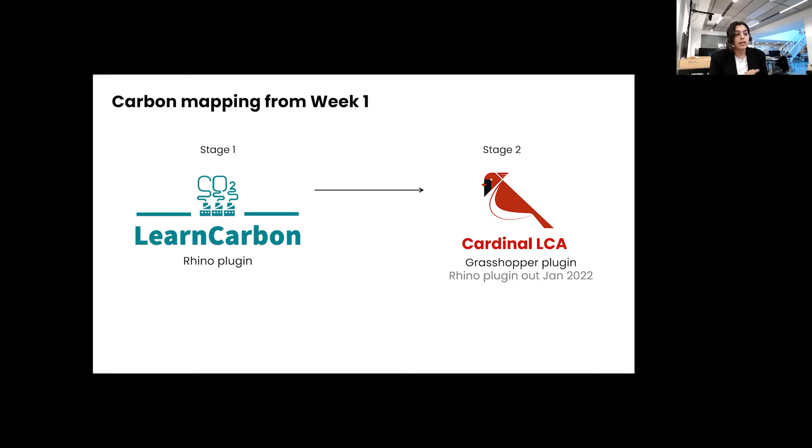So to start off with, we say that both of these are early stage tools, and that's what the topic of this presentation was. But how early are we thinking of? That's where we decided to bring both of these tools in, because Learn Carbon is more a Rhino plugin, which is at week 1. So at the time when you start building your building massing, when the project is just given to you. And Cardinal LCA comes in when the project is a bit developed, but not that developed to be in design development stage. It's still in the conceptual design stage or the competition stages.

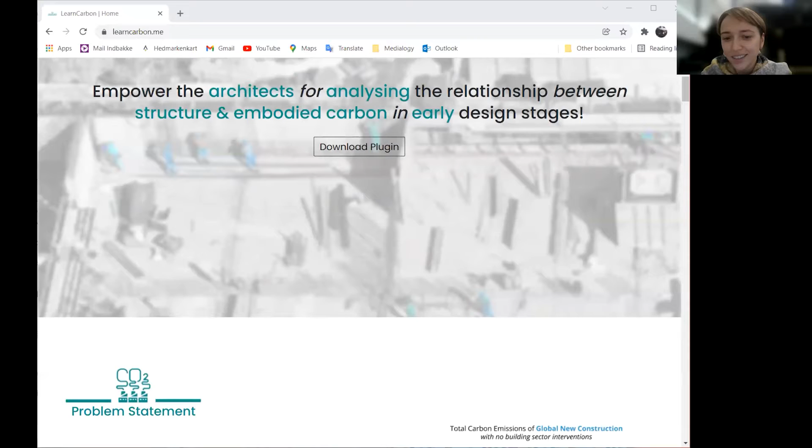I'm Panayota. What initiated our work is the fact that embodied carbon emissions are increasing day by day. And from research about future constructions, we can see that embodied carbon emissions will be 14% more than operational carbon emissions already by 2040. Additionally, the opportunity to change environmental impacts by replacing materials gets harder as a project develops. And as we can see in the graph here, such changes can change a project's budget severely.

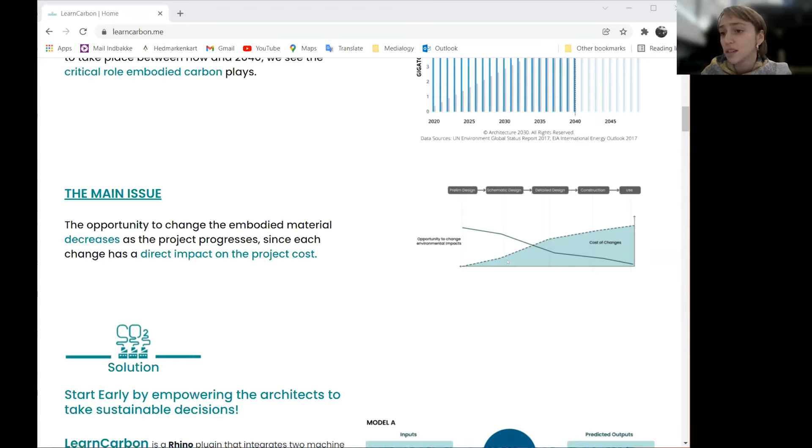As a solution to this, we suggest empowering architects to take sustainable decisions from early design stages of a project. And in order to do that, we created Learn Carbon, which is a Rhino plugin that integrates two machine learning models. The first one inputs a conceptual massing model from Rhino and then extracts data about the area of the building, the total buildup, and its structure type. And then it predicts the global warming potential of the building in a 50-year lifespan.

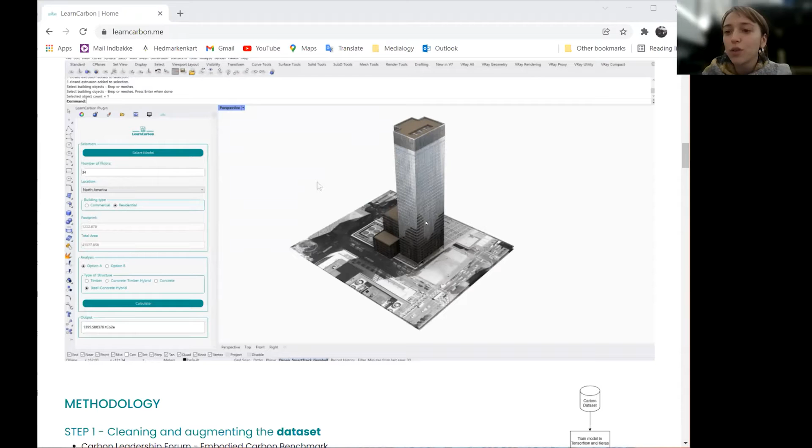In addition to that, the second model gets as an input the conceptual massing model, which means area and total buildup, and then we target a global warming potential value, and the machine learning model predicts a suitable construction structure type for it. As you can see here on the left, here is the plugin that we created in the Hackathon last month. And now Iliana, my colleague, will introduce you to the methodology and how we actually built that thing this weekend.

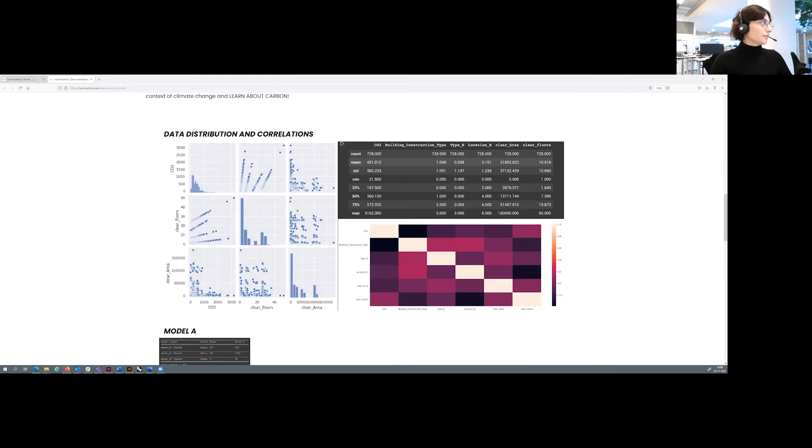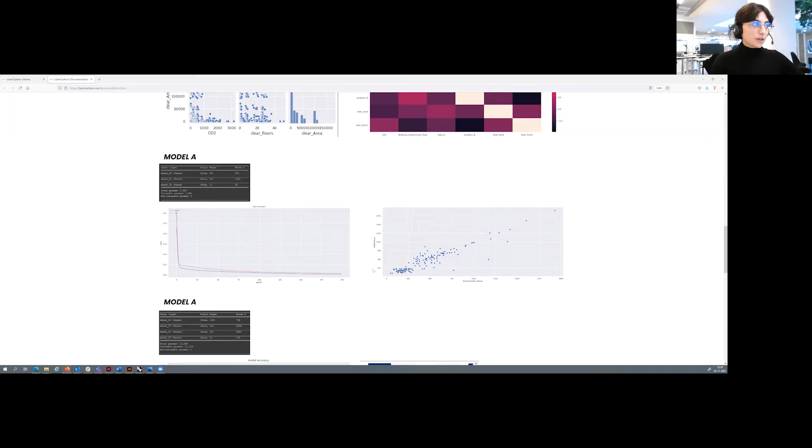And then for the training, we used Google Colab with TensorFlow and Keras to build the two models. The first model is regression because it predicts one value, the carbon emissions. And as we can see in the graphs, this is the loss graph. The model can actually learn. The dataset was split into train and test, so the testing was also from the same dataset. But we will see videos of different examples in the demo. And here in this graph, we can see the ground truth and the predictions, and that it's actually kind of learning.

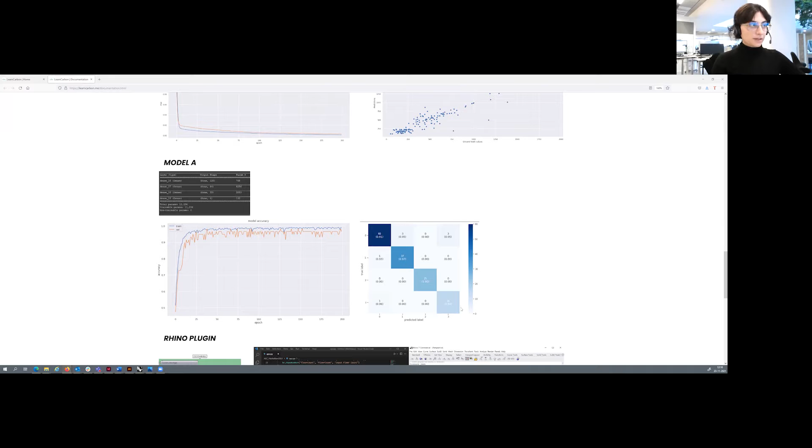And here is the second model, which is classification, classifying between different structure types. And here are the predictions and the true labels, and we can see that most of them are on the correct axis. So for the next part of the methodology, I will pass it to Karim to explain the link to Grasshopper Rhino.

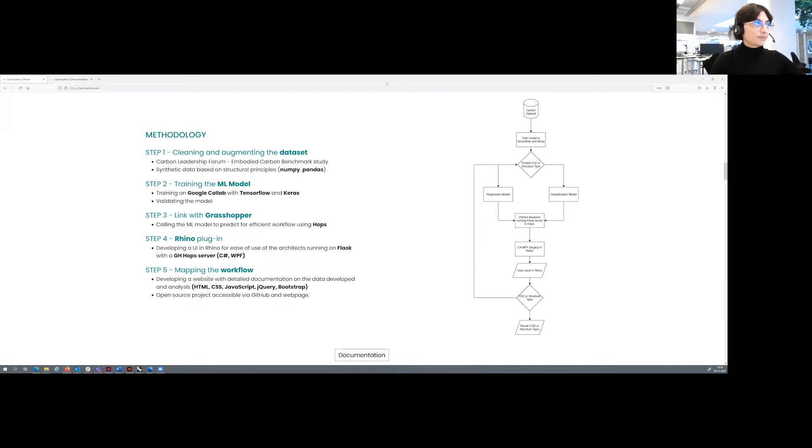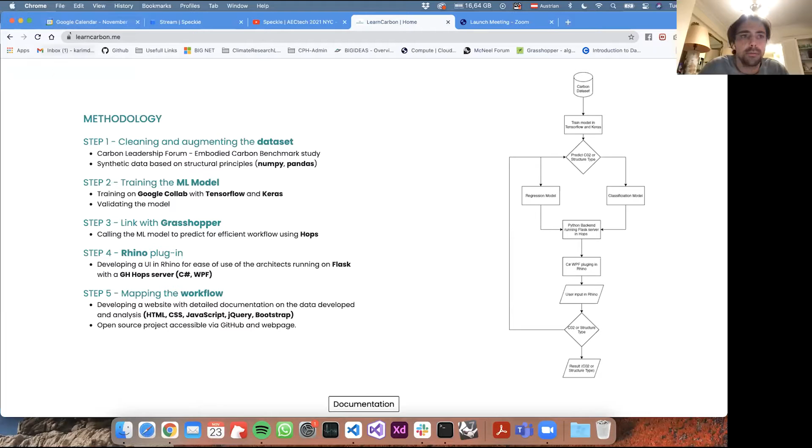You guys hear me okay? Maybe a thumbs up from someone. Yes. Sounds perfect. Great, thank you.

Cool, thank you, Iliana. So right now the challenge essentially was to connect everything together. Natively, all this technology doesn't communicate with each other. And given the fact that we are writing everything in TensorFlow in CPython, we needed to figure out a way for Rhino to look at the trained model in real time, and for the user to be able to fetch the predictions that a server would serve in real time, so that this interaction of the user and the prediction would be in real time. And there would also be this kind of synthetic feedback going back and forth.

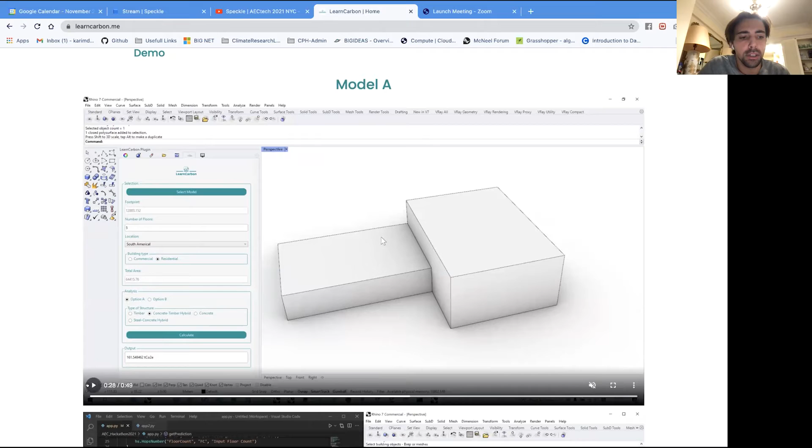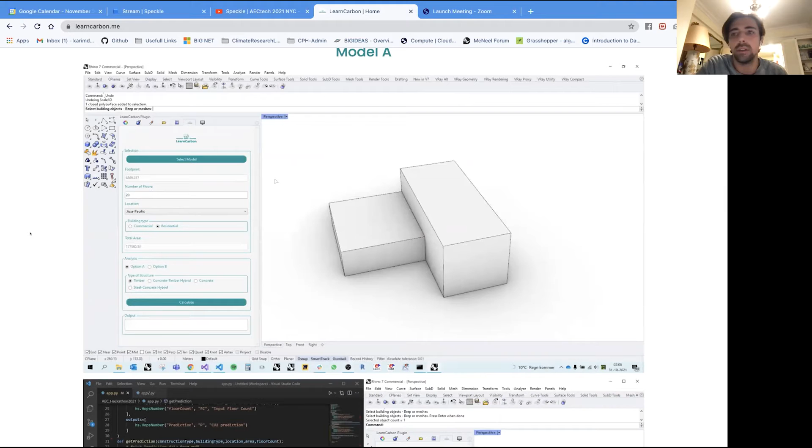So what we had to do was build a Rhino interface using the .NET framework. That's what you see on the left here. Essentially, it's just a heads up display where you would select the model, put in a few data points about the floor to floor height, whether it's a commercial or residential building, the region that this building would be built in, and also what the actual structural type is. And then you would hit calculate, and as simple as that, it would serve the prediction of that model. So that's the front end.

In terms of the back end, what's interesting is that Rhino has been doing a lot of open source development lately that we've leveraged in this case. Namely, the Hops technology has been really helpful here because it broke the barrier between the classic IronPython .NET ecosystem that's quite opaque to other libraries and CPython, which allows you to talk to any kind of library, in this case TensorFlow and all its peripheral dependencies.

And so in terms of how it's set up, it's actually very simple. Using the decorator pattern of Python, you can essentially just decorate a function that would call a machine learning model into a Hops component. Once you have that, you essentially have a native Grasshopper or Rhino entity that you can talk to live.

The only thing that you need to do is, in this case, it's run on a Flask server. So you would have to deploy a Flask server, and then that would be that live link that you could essentially ping, and that server would serve you those predictions in real time, as you can see in the demo here. So you would hit all your parameters and then hit calculate, and as you can see on the left, the server is being pinged and the information is being retrieved, and this is in real time.

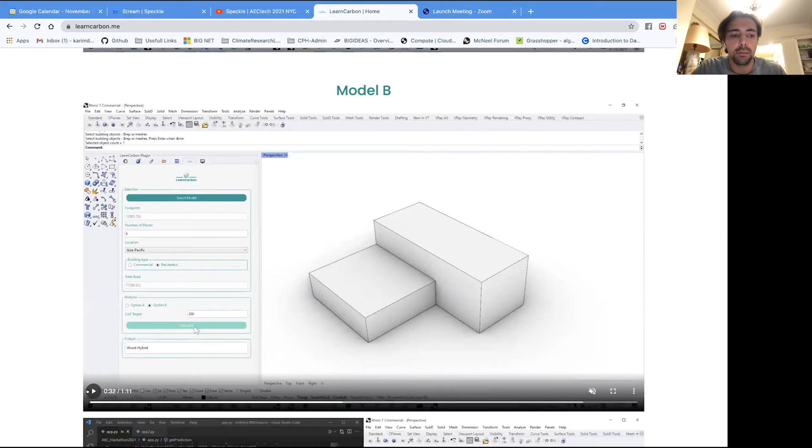So that would be model A, where the desired output would be the global warming potential being predicted. And model B, this is what my colleague was mentioning, that we have also created two separate machine learning models. And this is the one where you would predict the structural type given a desired global warming potential.

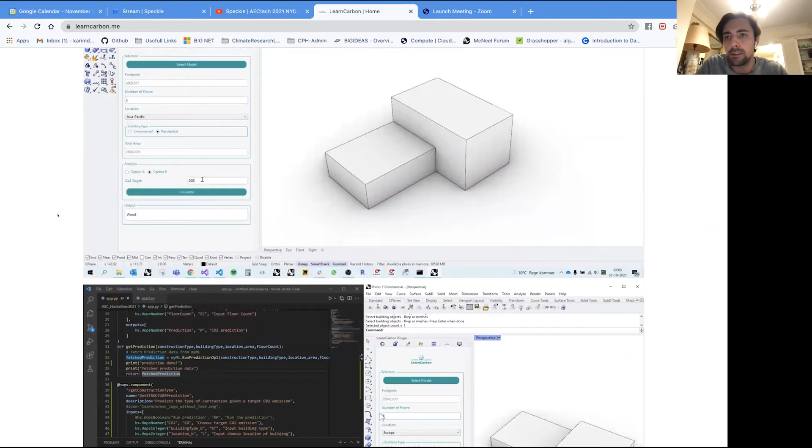Again, the nice thing about this technology is it's simple and very modular. So depending on what kind of prediction types, let's say, we want, we can easily adapt this for that purpose, since the entire code is very modular. And it's, again, using this Flask ecosystem with Rhino Compute over a local server in this case.

And the potentials of this are very good, because you have a road forward for scaling. You can have this server not be run on your machine, but actually be hosted somewhere else, whether it be AWS or an on-premises server. And then everyone could be talking to that server at the same time and getting their predictions, which has a whole swath of implications in terms of increasing the data set in real time and making the data set better, and also just sharing data sets. So that's extremely exciting. And yeah, so this is kind of a demo in that sense.

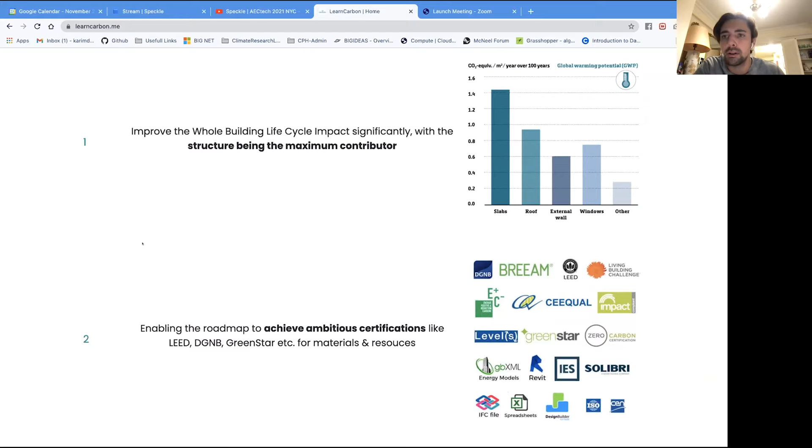So of course, the more holistic goal would essentially be to bring lifecycle assessment and carbon literacy or transparency to the designer. As mentioned again by my colleague, the impact that you would have in the beginning of a design routine is much higher than in later phases. So an obvious solution would be to bring this complex information to users at an early stage.

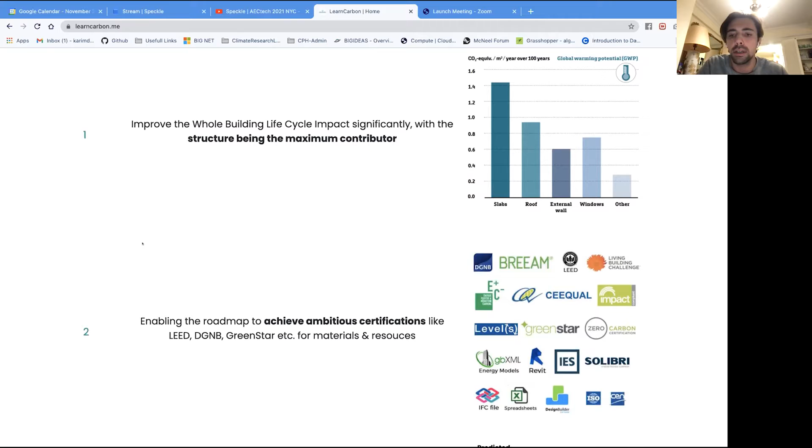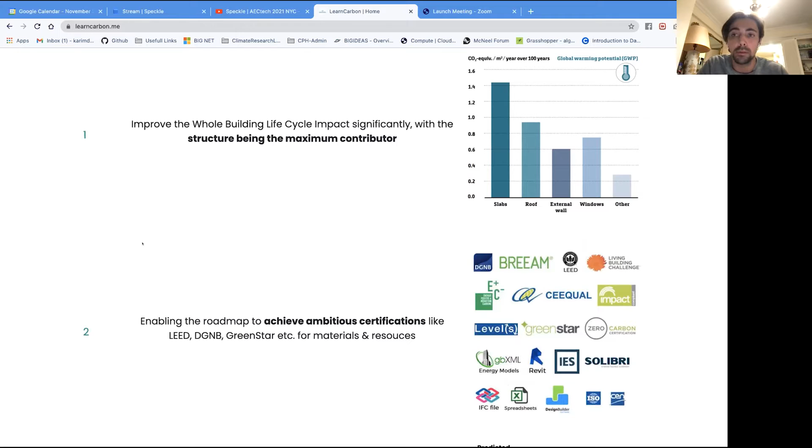Of course, calculating all these dependencies and all the phases in a typical life cycle assessment is a very difficult thing. And there's a lot of people trying to solve that with very smart technical solutions. What we're doing is trying to reduce that complexity and just serve the user with the necessary information that they would need in real time without them having to go in and take all the measurements and calculate all the embodied carbon themselves.

We're relying on a bigger data set and a bigger community of carbon transparency. And it seems like this is also the way things are going to be going. Right now, a lot of certifications and a lot of tools are embedding these kinds of technologies and these kinds of concerns in terms of carbon and LCA. So in terms of its placement in the zeitgeist of what's going on in the AEC industry, it's very well placed.

And right now we are looking specifically at phases A and phases B in the life cycle assessment, because that's what the data has shown to us. Of course, this can extend to all phases. It's basically just a matter of how much data we have and how much reliable data we can construct or enhance and synthesize.

Of course, this whole project was done in 24 hours, 30 hours or something. And so there are obvious limitations to it. This is a proof of concept, let's say. Again, with any kind of machine learning endeavor, data is the building block. The better the data, the better the product. And so the first priority would be to actually enhance the data and get more of it.

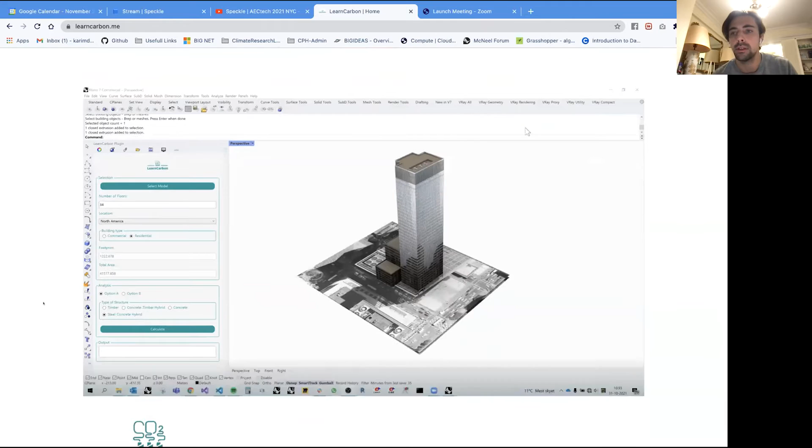This is our team. Four of us were here in Copenhagen, working away. Two of us were remote, Harry and Anirudh. And yeah, it came together very quickly, and we're quite proud of the actual result, both in terms of the fidelity and the design. Also, the UI design is, I think, very intuitive, and the workflow is pretty clear in terms of how it works. And the beauty about it is it has a very simple technology behind it that will scale pretty easily, in my opinion.

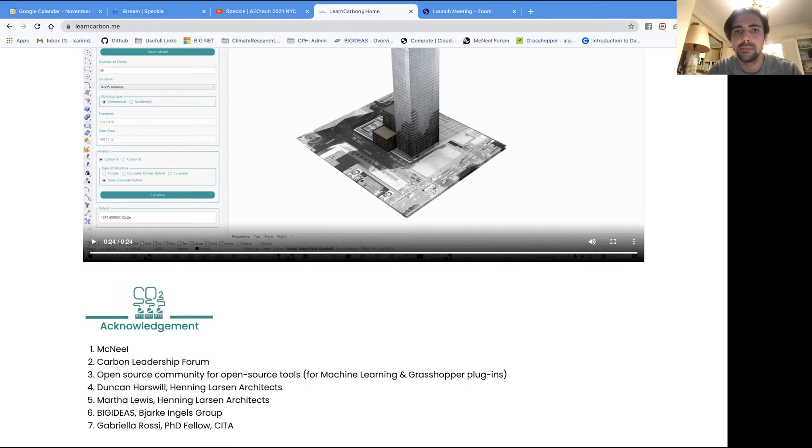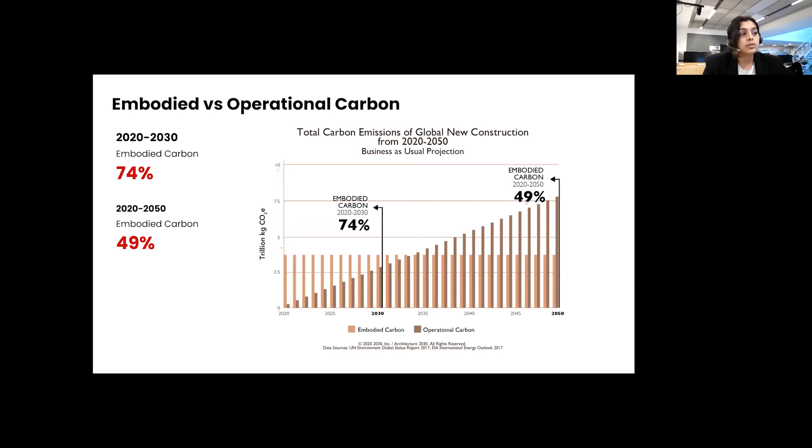Thanks, Karim. So as my colleagues already explained, we know that the ratio of embodied carbon to operational carbon is changing. If we look at this graph from Architecture 2030, we see that in a business as usual scenario from 2020 to 2030, the percentage of embodied carbon would still be 74% because of the upfront carbon from all the construction. And if we look 30 years down the lane after the building has been constructed, it would still constitute 49%. So it's a huge amount.

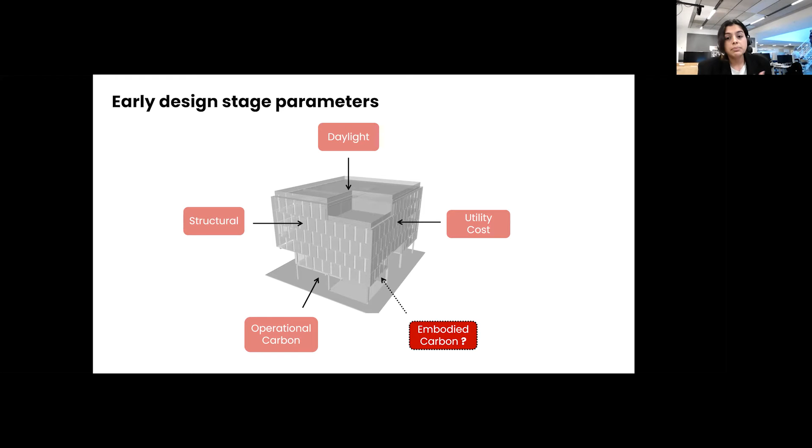And now we'll move on to Cardinal LCA. That comes in at a later stage, the next stage of the project. So when the design is developed and the architects are running simulations on daylight, structural analysis, operational carbon, utility costs, that might be in the concept or design development stage, but also in competitions, because most firms are doing these simulations in the early stages itself. And this is where we believe we need to take into account the embodied carbon studies as well.

But we understand that there is a lot of flexibility because the materials are not decided, and LCA is a tedious process because we don't have any clarity on the kind of materials we will be using. That's why we decided to make a tool which is a good balance between precision and ease of use. So it still gives you some information on what kind of materials you can use. It's good for benchmarking, and it's a good tool to guide you in the concept design phases. So you would know roughly what your project's GWP, global warming potential, would be, whether for a simple wall or the whole building.

So this tool has been developed as part of Harvard GSD. It started off as a simple project between me and my colleague Jessica, who could not be here because she's in the US right now, and she's not a superhuman like Karim is.

We have been developing it as a venture and a research project in collaboration with the Harvard Innovation Labs and the National Science Foundation in the US. And we have received some grants in order to develop that and also check customer validation and all of that.

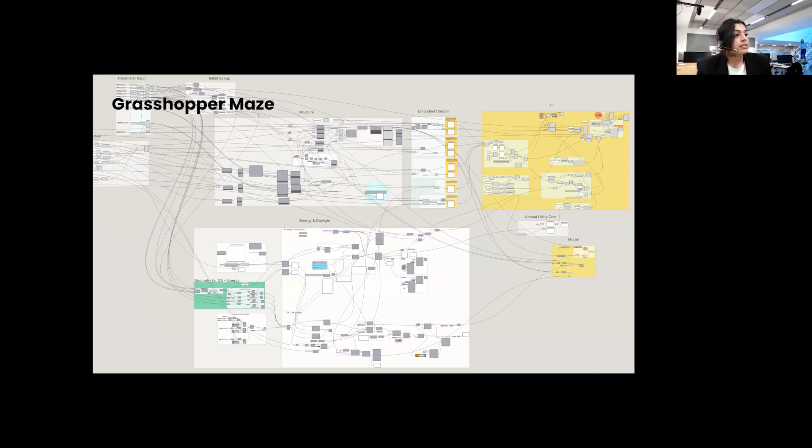So this is Cardinal version 0.0.0. This is what it looked like when we submitted the project as a final project stage. It was a Grasshopper maze. Nothing was organized. We had tons of interdependent components working together. And I just have a video of, you all would recognize this.

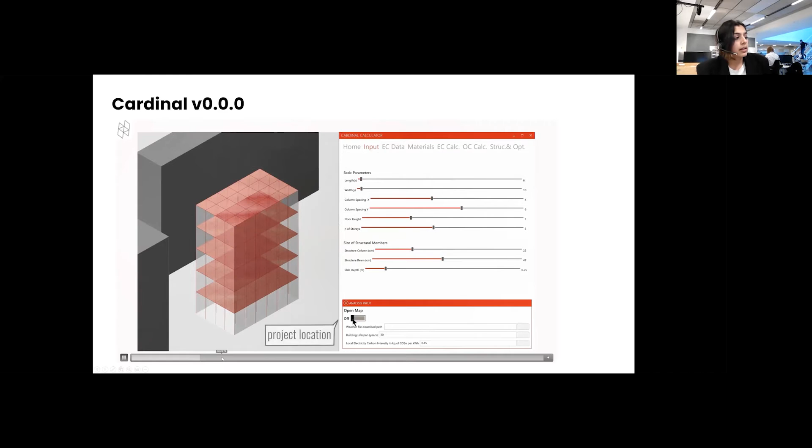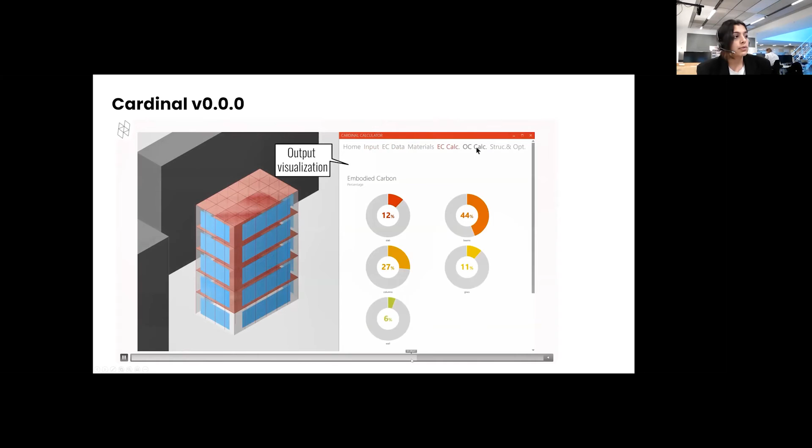It was linked together with Ladybug and Honeybee, so it helped you identify an EPW file in order to do the energy calculations. And then we were using ICE 2019 data, which is catering to the UK, in order to do the embodied carbon calculations. And then it basically gave you some graphs on both embodied carbon, but also operational carbon.

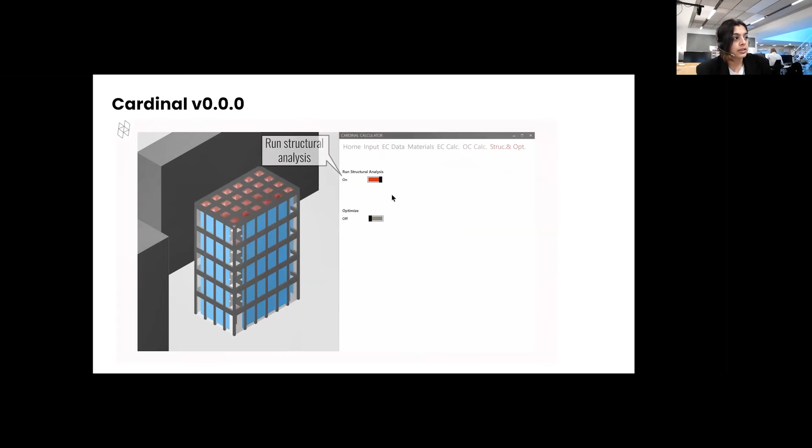We also had a feature that helped run the structural analysis and optimize it using some basic multiple objective optimization tools in Grasshopper itself.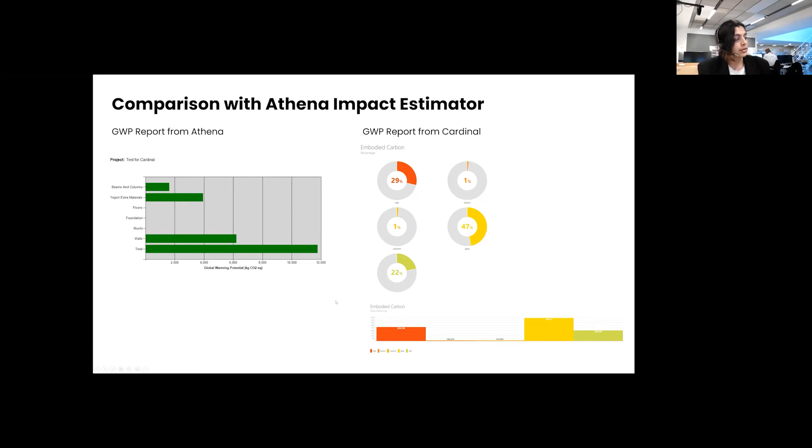So we compared this with Athena Impact Estimator, and we found the results to be quite similar, because you see that in here, glass is the maximum contributor, and in Athena, the walls or the envelopes which incorporated the glass were the front runner. And then we had the slabs as the forerunners, and then beams and columns that come in third. So we decided that maybe we should take it further.

We got good support from both the school, but also several external people who saw the presentation. And then we formed a team, which Hari and Anirudh are part of. We are 5 now. And we developed the Grasshopper plugin, which was super simple. It consolidated the whole Grasshopper maze into 4 very simple steps.

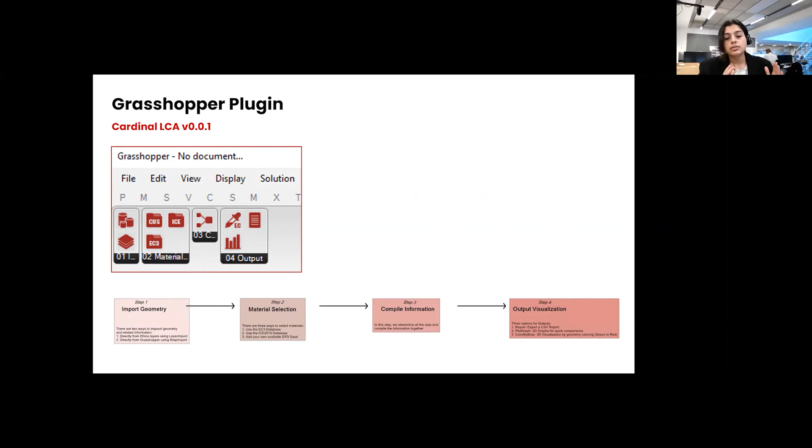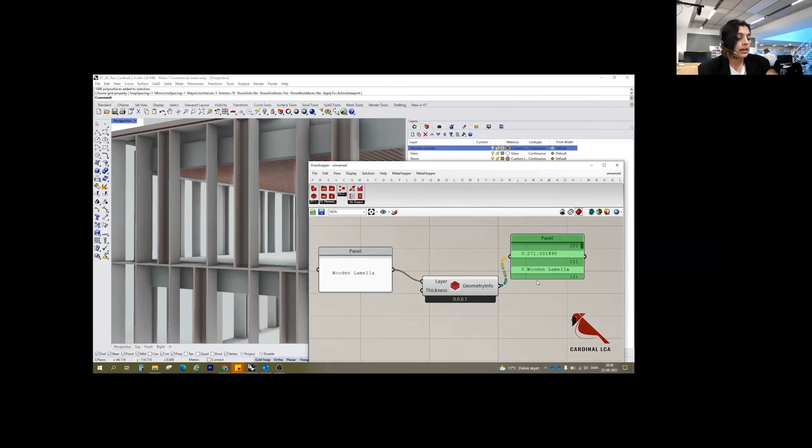So what you have to do first is basically import all the geometry which is already existing in your Rhino model. It can be done directly through Grasshopper if you have a parametric model. If not, we have a component that reads the layers directly from Rhino. So you just have to feed in the names. For example, in this case, we want to measure what wooden lamella consists of, and then we just write in the name. And then it basically gives you data on the total areas, the number of B-reps, and the layer geometry.

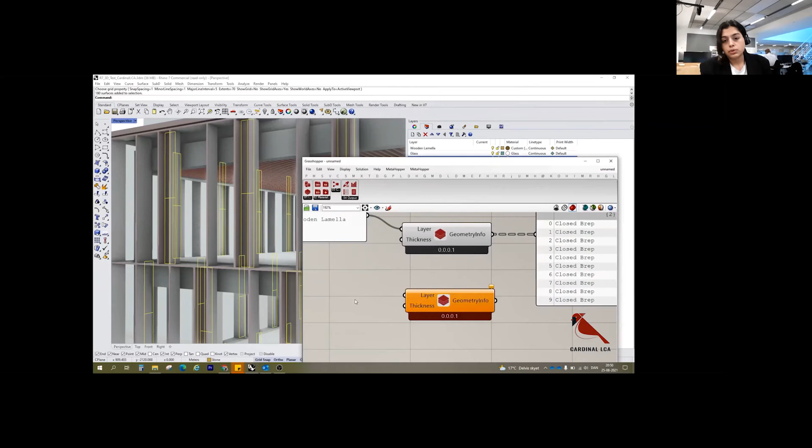If it's not a polysurface, you have an option of adding a thickness. So if your model is not at the stage where it's been developed with all the precision and you have no idea of a thickness, you can add a thickness manually and it will still work. For example, in this case, we have some stone panels on the facade, but we did not know what the units would be. So we just added a dummy value in order for the tool to do this calculation.

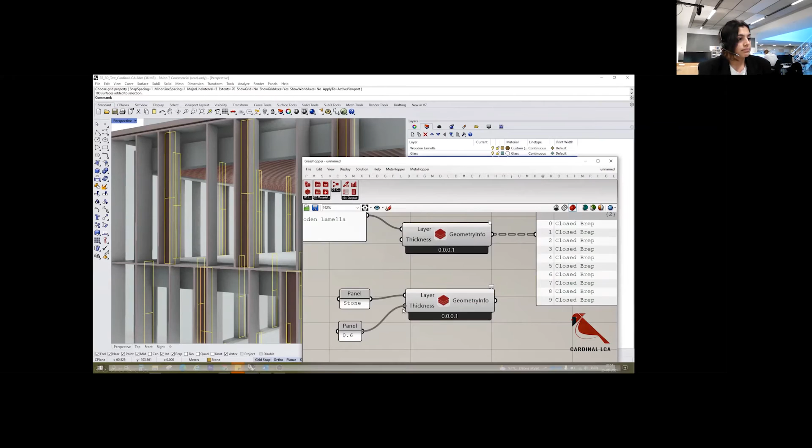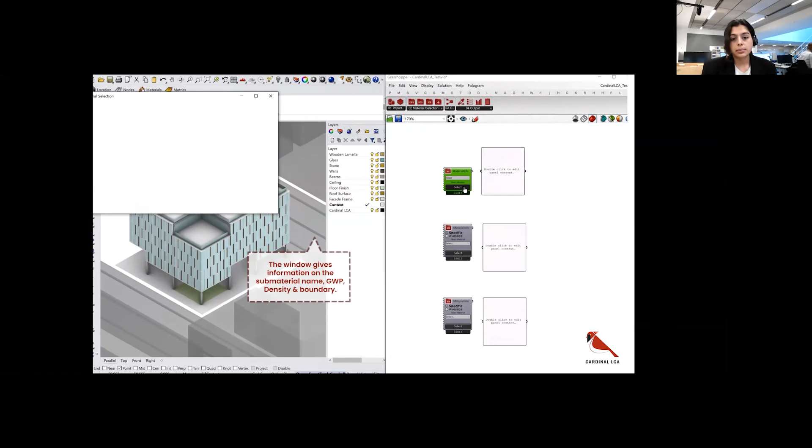In terms of material selection, which is the second stage, we right now have in the Grasshopper plugin 2 material sets, which is the EC3 database from Carbon Leadership Forum in the US, and then the ICE 2019, the UK database, as was in the original version as well. So if you just select the material type, you have different categories that the information is based upon: submaterial name, GWP, density, boundary, etc.

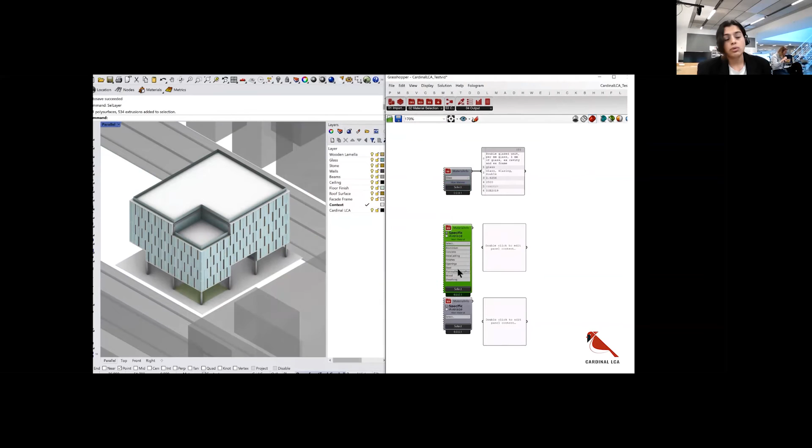In terms of EC3, we have 2 values. One is more specific, that gives you information on specific EPDs. But if you're not sure and you just want to do a comparison between, say, aluminium, steel, wood, then you can also go for average values. And these are the data which are directly taken from EC3. So they already have all that data processed and we're just calling it in.

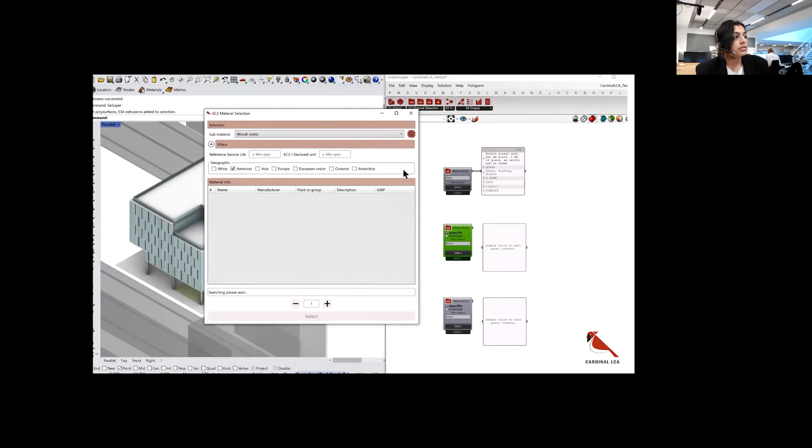In EC3, we have an option of several filters. So you can select the regions. We understand that it's mostly for the US, so they don't have a lot of data for other regions right now, but we are working together with them on A4 and A5 stages, and they plan to expand it further. Yeah.

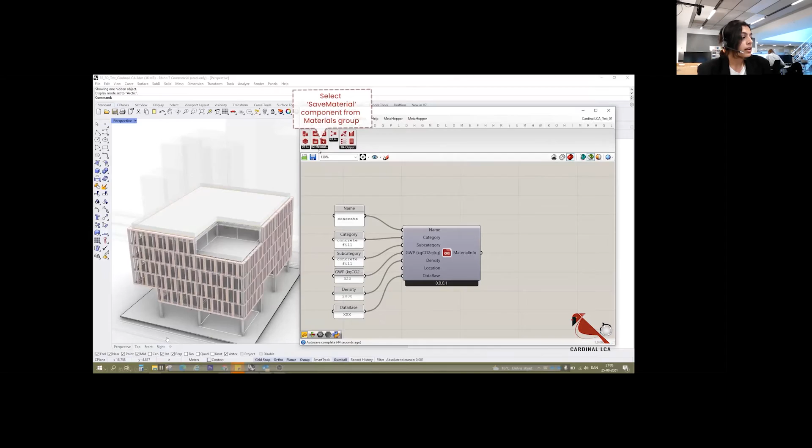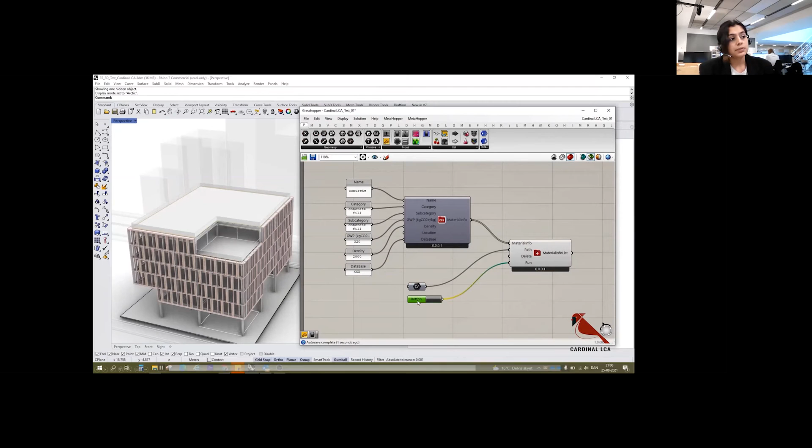And then another feature which makes it usable for everyone else who is not located in US or UK is that you can add your own data from any EPD which is pertaining to your region. So you just have to feed in these values on name, category, subcategory, GWP, etc. And then we have a component that saves all that data into a local file for you. So this is where the materials will be saved, and you don't have to save again and again. You can just call this file directly in the next model that you would want to test in.

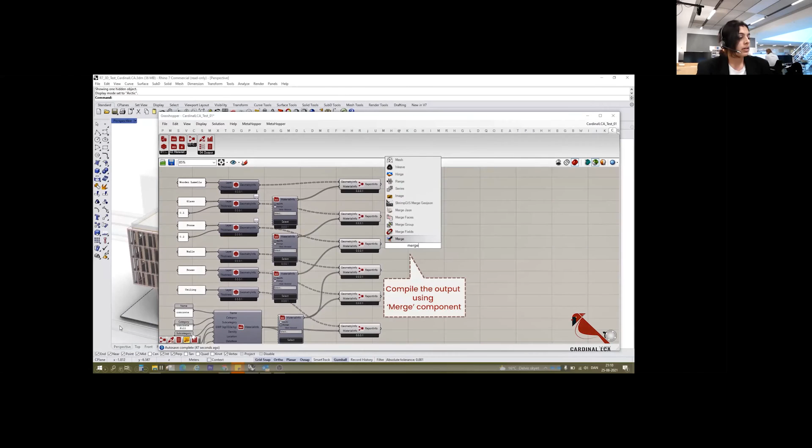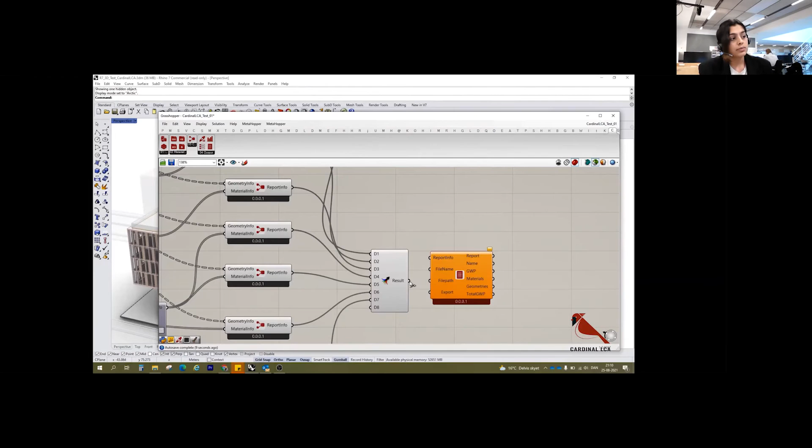And the last is merging all the information you have together and then feeding it into a report format that helps you read all the information that you've put in. It allows you to export an Excel file, but for those who just want to see the results in real time, it has all the information there on which layer has the most GWP or which material has the most GWP. And then you can keep changing things and it'll update in real time, which is the flexibility that most other LCA tools lack.

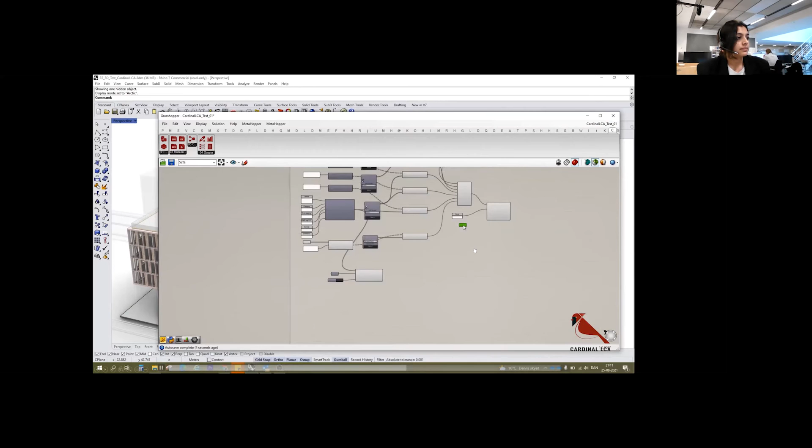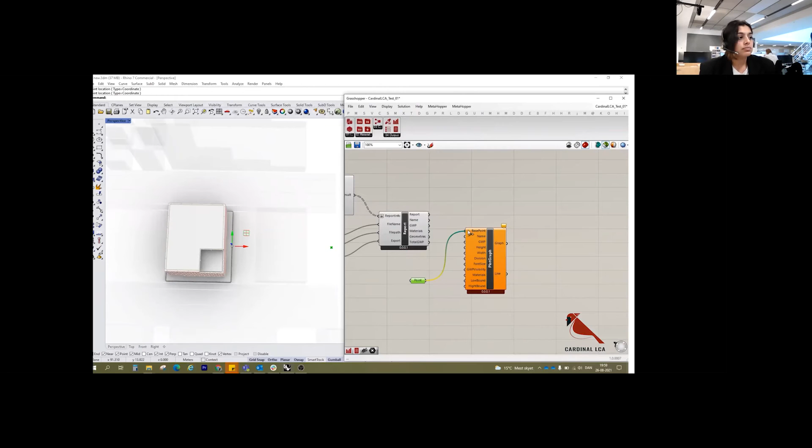And then we have an option of outputting some graphs as well, because that's what most clients or even architects understand. We know that these are not super beautiful, but it's more to convey the information at the moment. So you just put in a base point. It's similar to how most graphs in Grasshopper plugins work. And then feed in all the values that you have from this one main component, which is the report component.

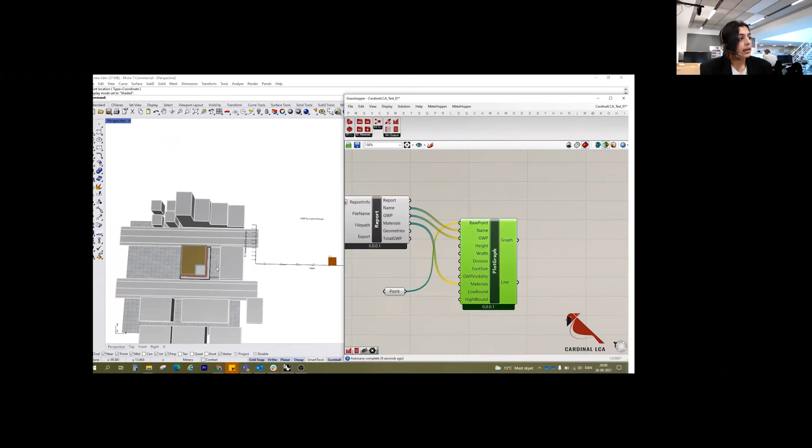And you can feed in information on height, width, division, customize the graph based on what scale you want the graph to be in. You can also put in colors on low bound to high bound. Right now it's green to extreme red, and it shows you the impact that each layer has, but also each material subcategory has. So there are two ways.

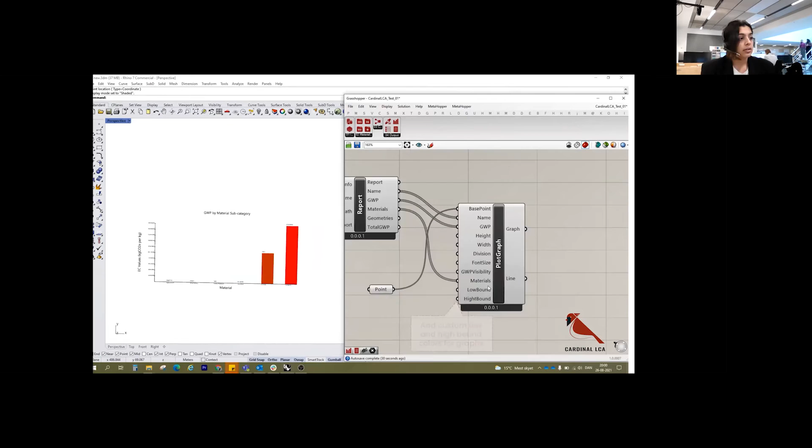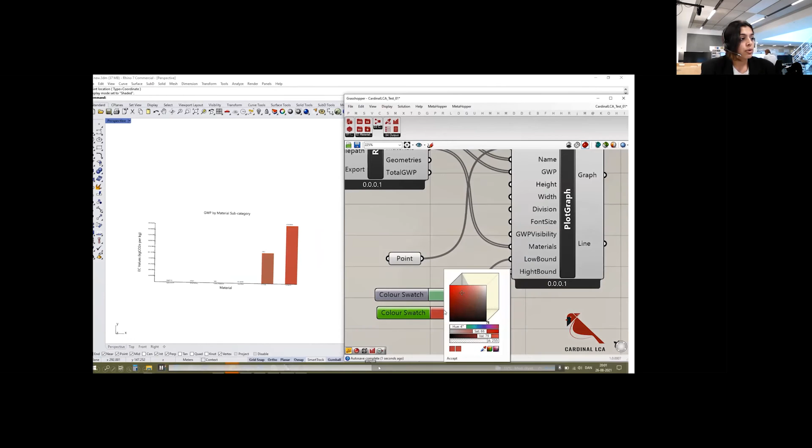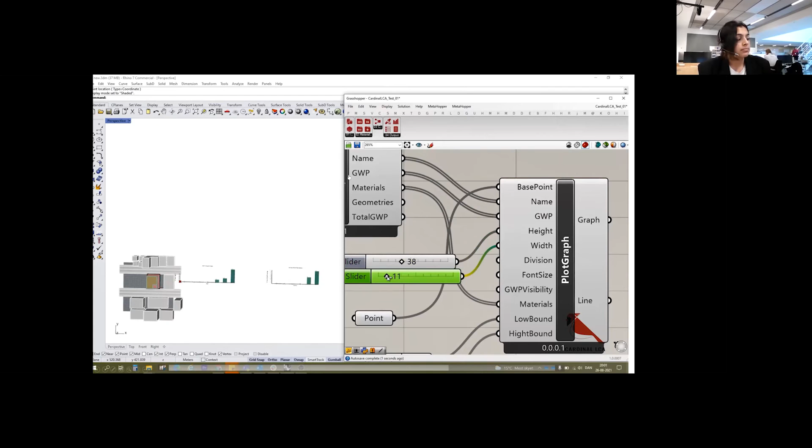So this is the 2D outputs, but apart from that, we also have a 3D mapping directly onto the Rhino model, which is something new. So if you just want to talk with your architect or client and show them that this is where most global warming potential lies in this particular geometry, you have the option of mapping it onto the 3D model and show it directly when the colors change from red to green. Yeah, and it's called ColorByBrep.

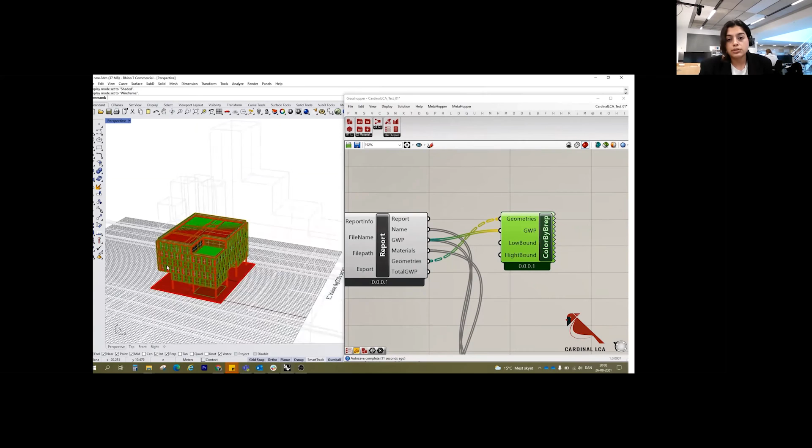Right now you can bake it, but it doesn't have any outputs as such, and therefore we would love for you to try it out and give us any feedback on what you think can make it better, or if you want some sort of additional dependencies on how to translate this information better, so you can talk with the clients or with the architects for that matter. Yeah.

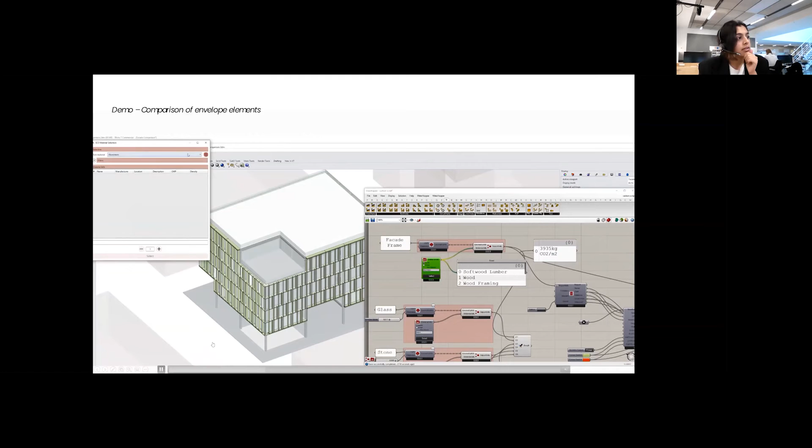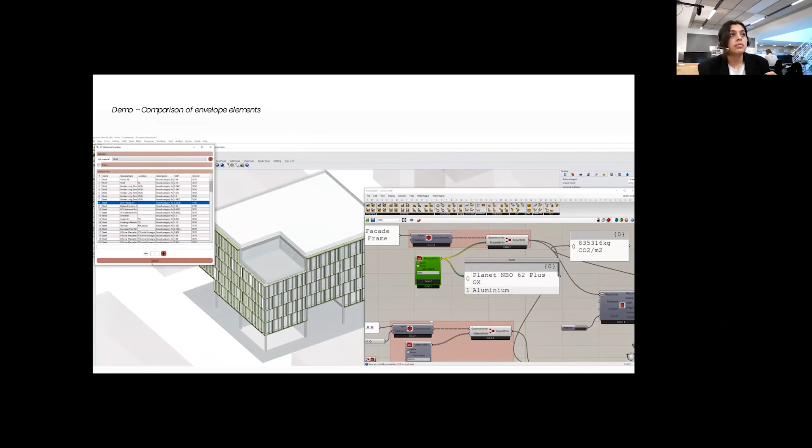Okay, and this is just a demo that we did at Henning Larsen itself. We were working with these facade assemblies and we had to make some comparisons. So we see that it takes in that geometry, it takes in the thickness based on what the element would be once you change the material, and then it gives you outputs in real time. So we understand that it's not 100% precise, but it gives you some sort of indication on which direction to go for at this stage. And that's what this tool is all about.

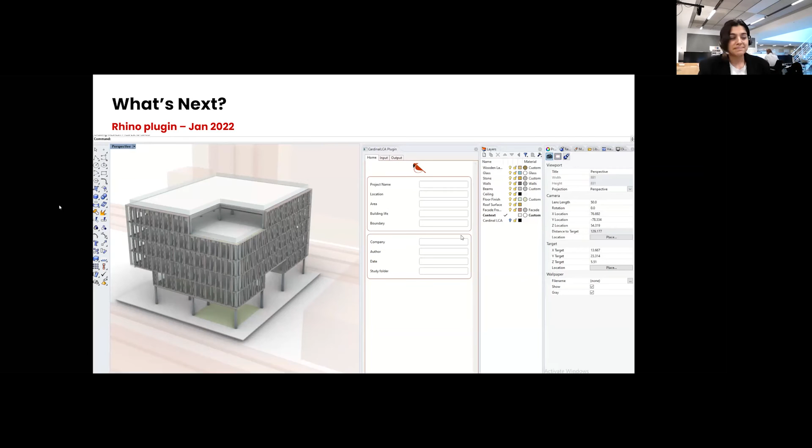And for what's next, I'll hand it over to my colleague, Hari, who's been developing this wonderful Rhino plugin. Thank you, Kritika. So myself, Hari Prasad, I was part of the development team for both Cardinal and Cardinal LCA. So the goal of Cardinal is to bring early stage LCA calculation to everyone. As a part of this, we have decided to make a Rhino plugin for non-Grasshopper users. So we have created a plugin using .NET WPF, and this plugin is still under development. So here you can find the demo video of the plugin.

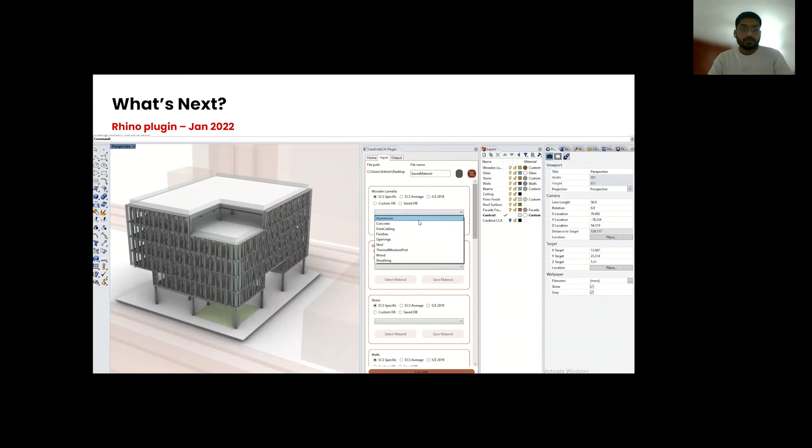So in the home page, the user can fill in the project information, and in the input page, you will find all the layers that are present in Rhino as a panel in this plugin. So the user can select the materials for each layer. We have EC3 specific, average, and ICE database, and also you have the custom and saved databases. In the top, you can find the path to locate the saved materials where the user can choose the saved materials. And here, whichever layer is used, you can select the material for that particular layer alone.

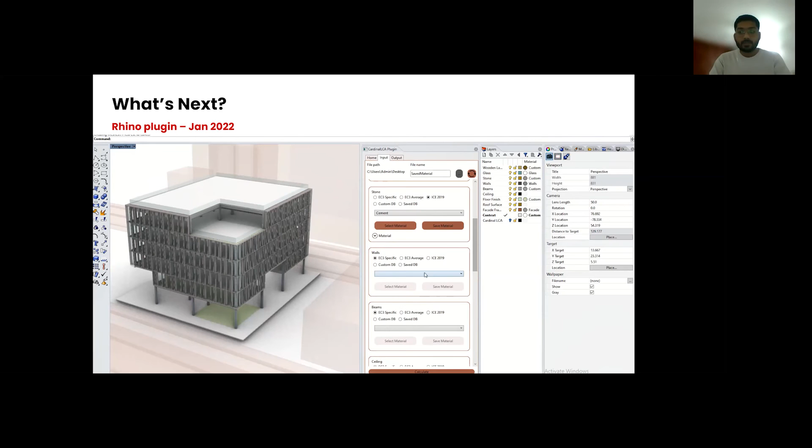And after selection, click the calculate button, and the output will be generated in the output page. In the output page, you can find the graphs and the detailed report summary of these calculations. And we are planning to release the tool by January 2022. And here you can see that you can fill in the custom material details, and the output page. Here is the page. Thanks, Hari. So now is the time to let us know what you want in the Rhino plugin.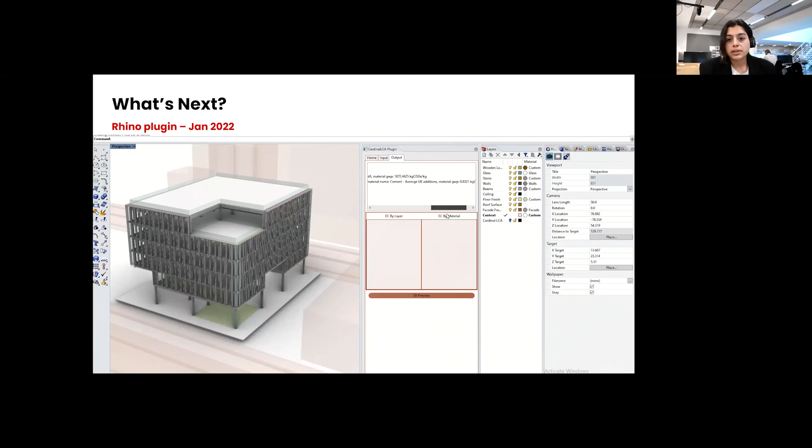Yeah, and we are also developing our own API, and I'll hand it over to Anirudh, who's been working heavily on that. Thank you so much, Kritika. I hope I'm audible. Okay, so for LCA calculation in Cardinal LCA's plugin, we would require some legitimate data from different sources, which would be relevant to maybe the manufacturing and impact related information for the building materials. According to our research, we have recognized a couple of databases, and there are some challenges which we are looking

Talking about databases, we have very limited EPD data, which covers very few countries, and the structure, the format of data in each of these, as well as the future databases that we are going to use, are completely different from each other. This will require us to standardize according to a specific structure that we are going to use for our plugin. In some databases, luckily, the data is structured into tables, but we have recognized a couple of them which are in PDF formats as well. We are working on bringing all the different forms of digitized and non-digitized data into one digitized form.

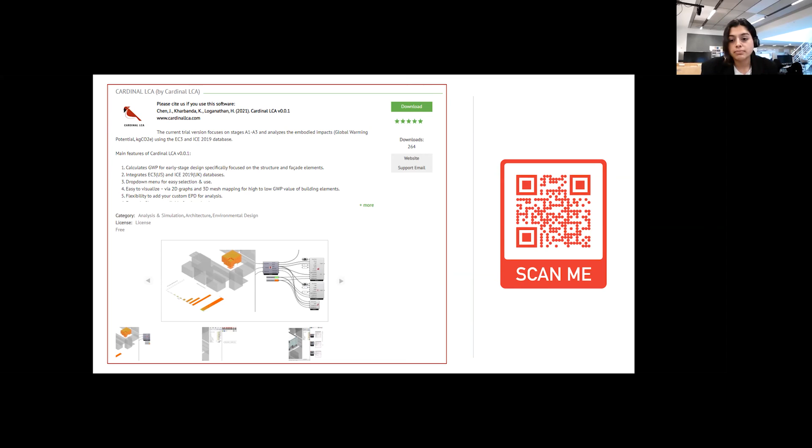So thank you so much again, David and Jakob and everyone else. And yeah, over to you, David. Thanks for the fantastic presentation. I think we'll open it up for questions now, and we'll have Jakob. He'll be moderating the questions from his side. Yeah. I've got a few questions. I think Ross, your question was talked about right at the end. So I will ask Ross if you want to address your question. I just have to find you in the list. Ross, you can have the word.

Thanks, Jakob. Roger is actually a colleague of mine, but I think he had to jump off. Very interesting presentation, guys. It's really super.

My background is in cost management, and the biggest challenges for us are in the earlier stages when we need to benchmark costs, and the same questions are being asked of us now from our clients when we need to benchmark carbon. So in terms of BIM, we're fully connected with the 3D models and the development of the design material, but a lot of the questions relate to the earlier stages before we have any design material. How do you see that happening in relation to carbon, and have you discussed that internally?

I think I can answer this, but basically what we do in Rhino, in the input, we translate the model into numbers, numbers that describe the model. That's how the model learned as well. So if we had these numbers, for example, the number of floors, the total area, and the footprint, and of course the location and the type of building, we could have a prediction out of that.